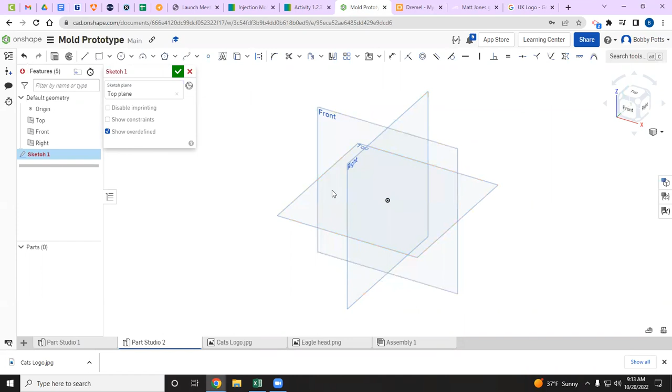So to do it, I'm going to create a sketch on the top plane, and I'm going to start by just making a quick outline for my candy. I don't want it to be too big, so I'm going to make a 1.5 by 1.5 box. If I can fit everything into that, I feel good about its size.

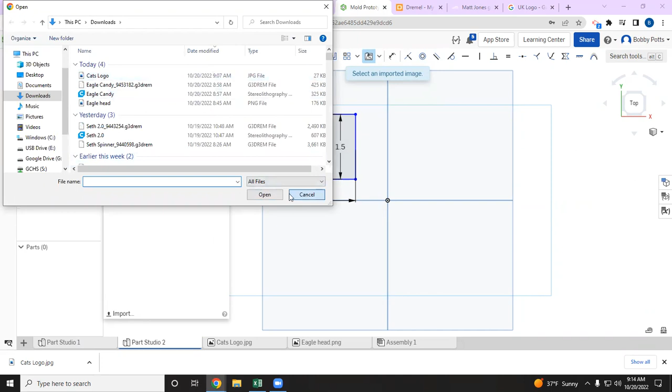But now I need to insert an image. To do this, you need to import. If you don't see import on your screen, hit control screen, go full screen, click import. Find your image, open it up, and then you should have the image here to open. I'm going to click that, and now it's ready for me to add.

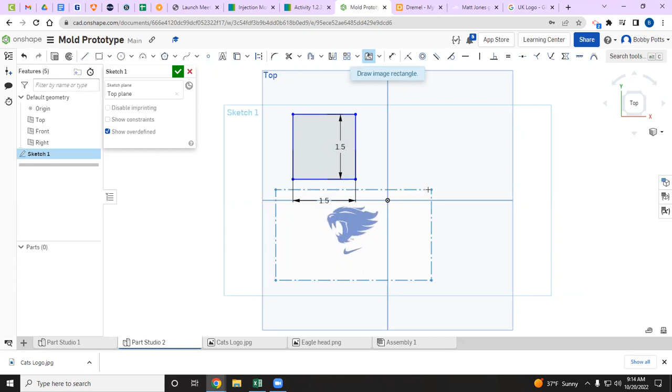I'm just going to kind of use this box to gauge my size, but I'm going to drag it, and whenever I like the size of that head so that it'll fit into that box, maybe right there. Now I can drag it, sized up pretty good, so I know that my candy will fit around that. But I'm going to finish that sketch. I don't want to do all of my tracing in that sketch because it'll mess up as I try to extrude.

But when it's like this, I can turn that sketch on and off. It's always there, but I can hide it or make it visible, and it's going to be important moving forward. So, new sketch, top plane.

I'm just going to grab my spline tool and I'm going to trace this. Now these long edges, you want to try and spread out some of these clicks, but anytime you're in these tight spaces, more clicks helps out. I'm just going to be quiet a minute and it's done.

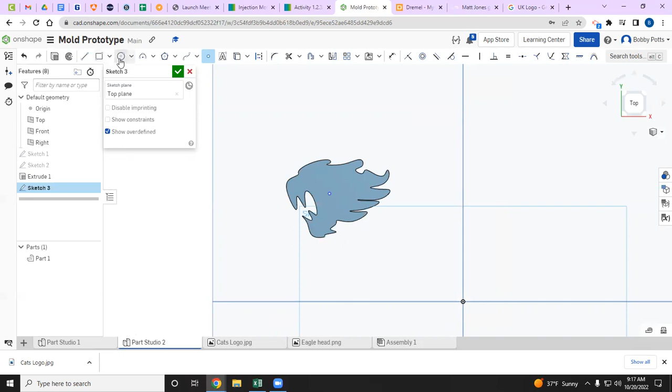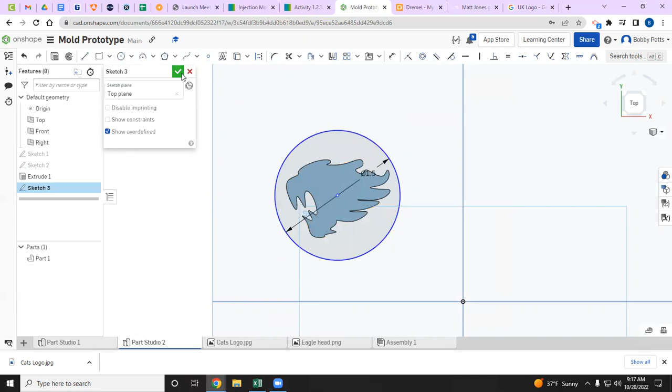Next thing I'm going to do, again on the top plane, I'm going to create a circle, starting by placing a point kind of in the center of my cat, and I'm going to make that 1.5. Didn't quite place where I want it, so I'm just going to move it, and I like it right there. I'm going to finish that and do an extrude, and because I want the head of the cat to be a little taller, and I made it 0.4, I'm going to make this 0.2.

If I do that, looking at it at the angle, looks good, but I'm missing some detail. So I'm going to turn my sketch back on, and I'm going to add these eyes and that nose.

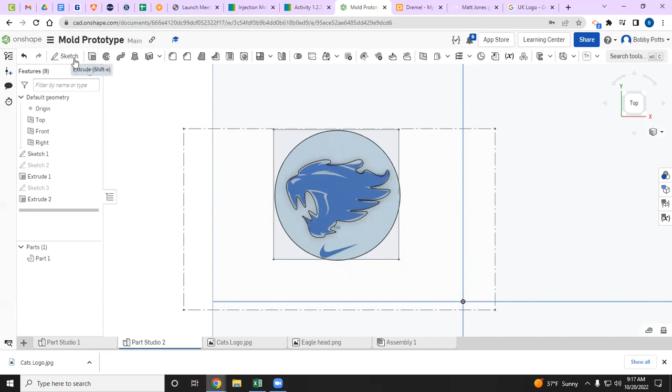So I'm going to create a sketch, and this time I want to build on top of that cat's head. So I select it, get my spline tool again, trace that eye. That looks good. I'm going to get this nose.

I'm going to go ahead and do this part too. Maybe this thing will end up looking more like the cat. All right, right there.

Okay, so finish with that and do an extrude again. I want to extrude that, that, and that. This time I'm going to remove. I want to indent it, and I don't want it to go very much. I'm going to do 0.05. Check mark, turn off sketch one.

Doesn't look terrible, doesn't look too bad, but there is my piece of chocolate.

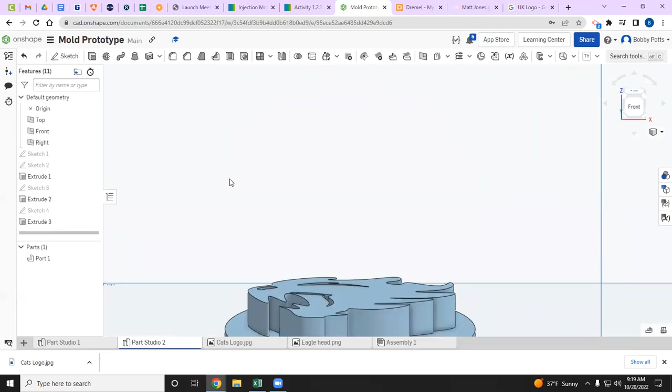That may be sitting a little bit high, so I can adjust my extrudes. Let's try 0.3. That looks a little bit better. All right, so I like that right there.